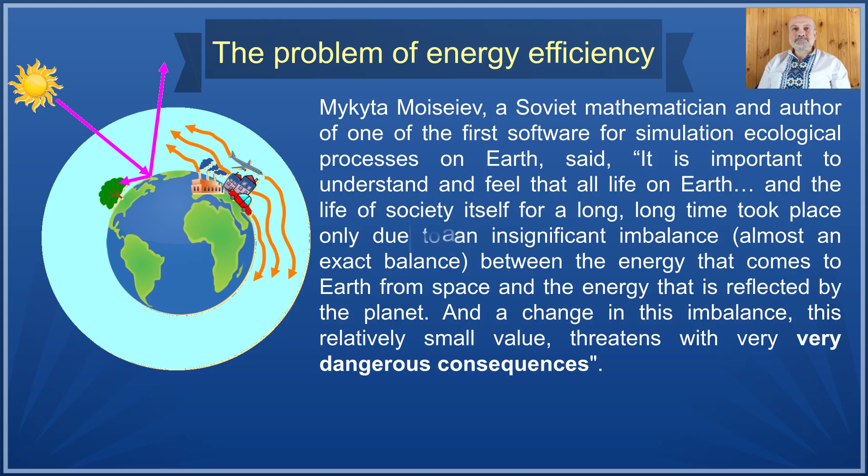This creates a vicious circle of problems, leading to an avalanche of climate change. Therefore, increasing energy efficiency is a key task for achieving Sustainable Development Goal 13. Energy efficiency must be implemented comprehensively, accounting for energy generation, transmission, and consumption as a single system. Otherwise, efficiency will be reduced.

A comprehensive approach to energy efficiency in construction: the energy efficiency of a building begins with the choice of its shape, since heat loss occurs through the thermal envelope - the walls, the floor, the first floor or basement, the roof, or the attic floor. The most rough criterion for optimality is the compactness ratio, the ratio of the area of the thermal envelope to the volume of the building.

For buildings in which all horizontal sections have the same shape, the ratio of the perimeter to the area of the horizontal section can be used. The smaller this indicator, the less heat loss there will be, meaning the building will be more energy efficient. In all cold countries, in accordance with this criterion, builders tried to construct houses of the simplest possible shape.

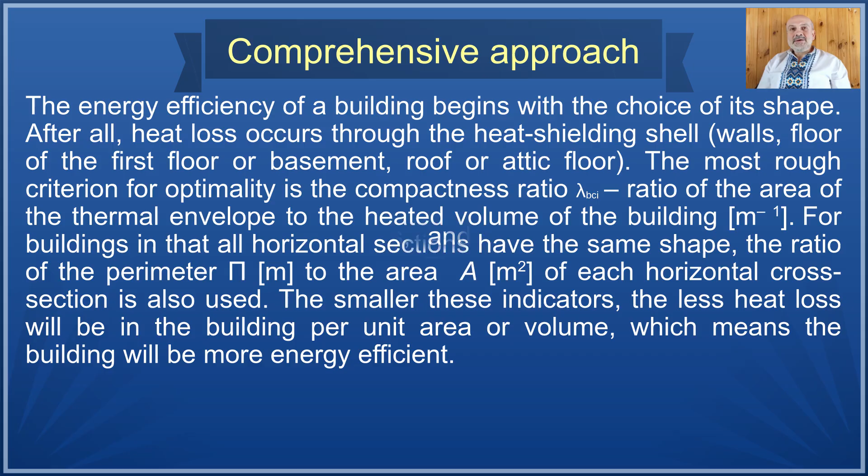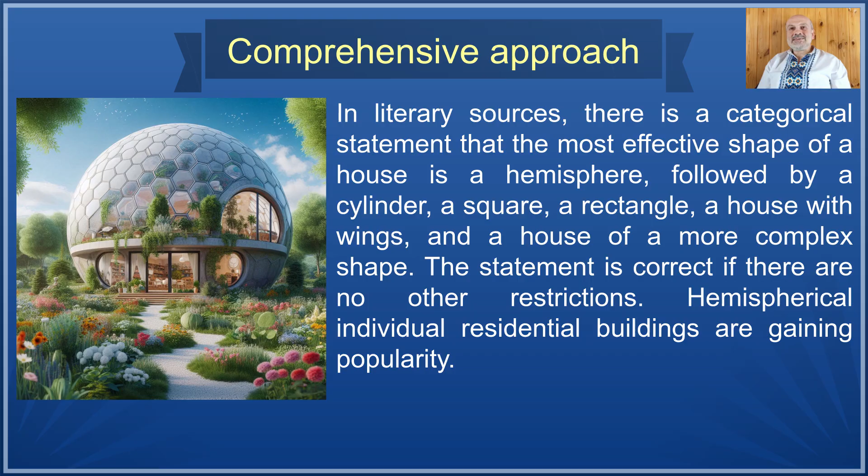In literature sources, there is a categorical statement that the most effective shape of a house is a hemisphere, followed by a cylinder, a square, a rectangle, a house with wings, and a house of more complex shape. This statement is correct only if there are no other restrictions. Hemispherical individual residential buildings are gaining popularity.

For a residential and office building of a certain layout type, the conditions of natural illumination limit the maximum distance from any internal point in the plan to the external walls. Under these conditions, round or square buildings in plan will always have a larger area of thermal envelope than a rectangular one. An oval shape will be even better.

At the same time, enlarging the building length decreases the perimeter per unit area. If the shape of a building with wings were so inefficient as described, castles and palaces would never have been built in this form in our latitudes. Nevertheless, figures show the equivalence of the winged shape and the rectangular building by perimeter, area, and volume, if the width and height of all parts of the building are the same.

Similarly, turning a building at a street corner doesn't change these parameters. The criteria given don't take into account the influence of solar radiation or wind conditions from different directions. Therefore, constructing the optimal geometric shape is a difficult task.

Further, the choice of indoor environment parameters will have an impact on energy efficiency. This choice always faces a contradiction between comfort and energy consumption. Thermal comfort of a person corresponds to the case when he is able to dissipate all the heat produced as a result of metabolism without straining the thermoregulation system, and even more so without increasing or decreasing body temperature - hyperthermia or hypothermia. The heat productivity of a person from metabolism depends on the activity.

The possibility of heat transfer are determined by 5 microclimate parameters: air temperature, relative air humidity, air velocity, the level of velocity pulsation or turbulence intensity, and the average surface temperature or radiation temperature, and in addition by the thermal resistance of clothing. Thus, the energy efficiency of the building's microclimate formation strongly depends on non-building factors such as lifestyle.

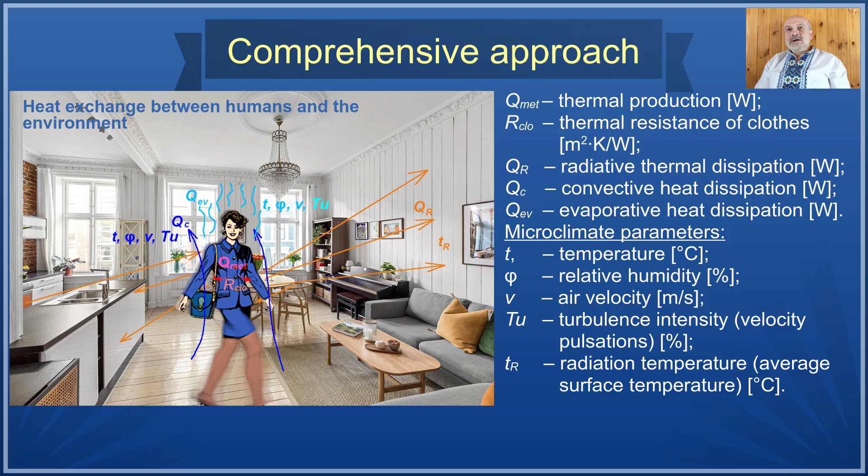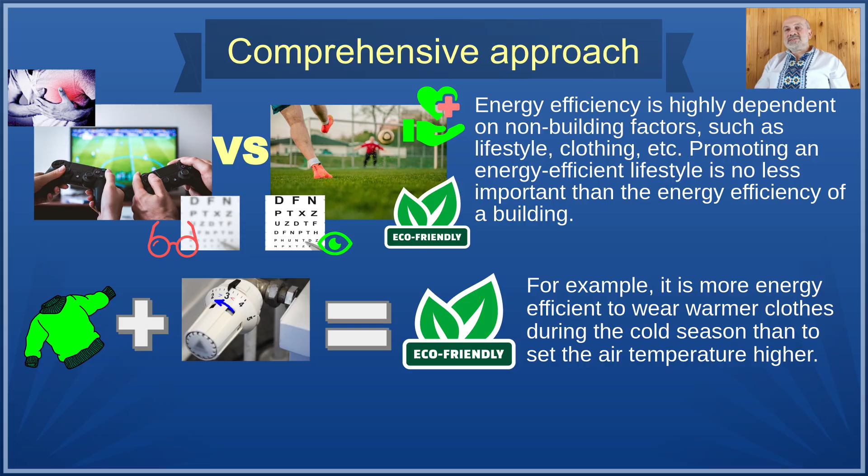Clothing, etc. Promoting an energy-efficient lifestyle is no less important than the energy efficiency of the building itself. For example, wearing warmer clothing during the cold season is more energy efficient than setting a higher air temperature.

The next bastion of heat and cold preservation is the thermal envelope. Undoubtedly, increasing the thermal resistance and increasing the tightness reduce the heat loss of building, which are the main directions of increasing energy efficiency. Nevertheless, thermal inertia has a double effect.

It reduces the influence of external temperature fluctuations on the thermal regime of the room, which facilitates the work of engineering systems. On the other hand, it creates a significant delay in the reaction of the room to internal variable heat gains, and accordingly complicates the reaction of engineering systems to them.

Further, the energy consumption of a building for the microclimate formation and meeting other needs is determined by its engineering systems. The two main requirements are minimal unproductive energy losses and effective automation of the response to changing indoor and outdoor conditions. Practice shows that thermal insulation of a house without heating automation increases energy consumption because people are forced

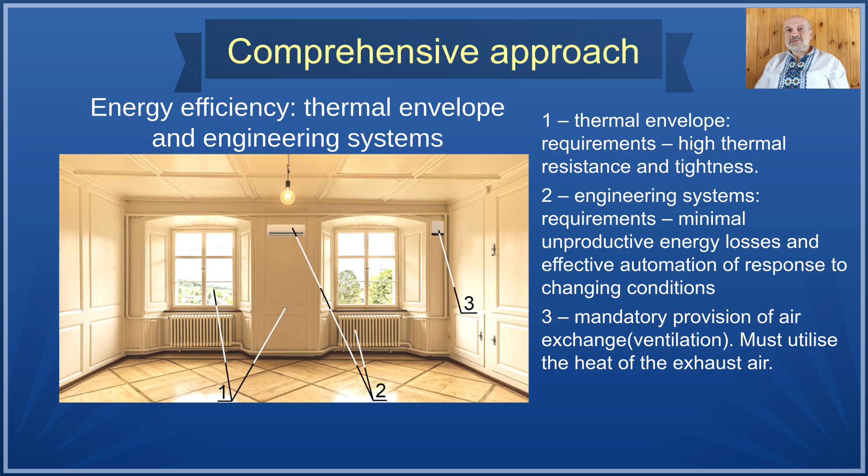to dispose of unnecessary heat by opening windows. Sealing a building allows controlling air exchange but doesn't eliminate its need. It's strictly forbidden to avoid sufficient ventilation in a sealed room.

Otherwise, moisture, carbon dioxide, and pollutants from furniture and equipment will accumulate in the room. Increased humidity will lead to development of mold, which releases the world's strongest carcinogens, mycotoxins. As a result, a sick building syndrome occurs, manifested by symptoms of respiratory, cardiovascular, and other diseases that are not treatable with medication. It's treated only by ventilation.

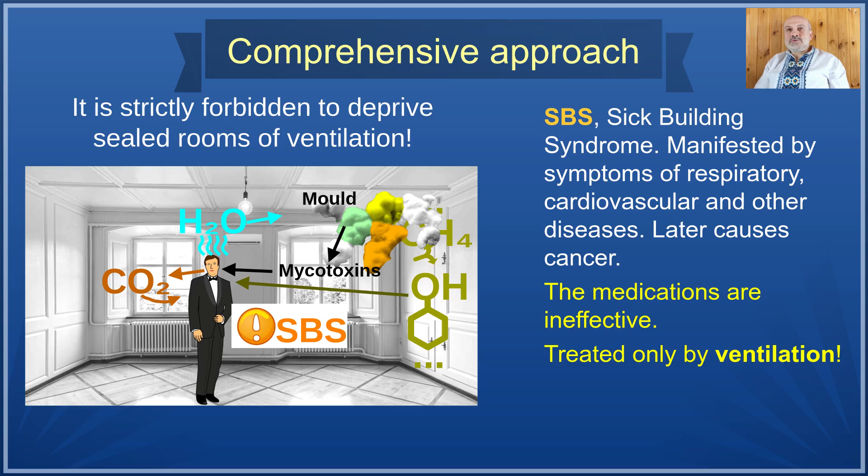For energy-efficient ventilation, there must be utilization of exhaust air heat. Also, the utilization of heat from sewage and other possible sources is envisaged.

To summarize the different ways of energy consumption of different energy types, the concept of primary energy, extracted energy before any conversion, is currently used.

For different energy carriers, primary energy coefficients are taken into account, which consider its conversion and additional costs for obtaining the energy carrier. This approach is not ideal because it doesn't take into account the different potential of its different

types. For example, electricity can be converted to heat up to 100%, and the efficiency of the reverse conversion is limited by the second law of thermodynamics.

A more adequate method, exergy, takes into account only that part of energy that can be obtained before achieving equilibrium with the environment. Despite better compliance with the physical content, this method still expects widespread use in construction.

To determine energy efficiency, the concept of energy efficiency classes was introduced. Back in the last century, the system of energy efficiency classes was calculated from A, the highest, to G, the lowest. The problem with this approach is that as the development of technology and energy efficiency increases, the classification system in this direction reaches a dead end.

There are no letters before A. It's impossible to fix this for established association among consumers. Therefore, it's necessary to introduce classes A+, A++, and A+++, and then rewrite the entire classification system.

So old class A equipment may correspond to modern class D. It should be understood that the energy efficiency class itself doesn't determine a specific value of energy consumption.

It's a range of possible energy consumption relative to certain baseline levels. Actual energy consumption is affected by operating modes, device settings, lifestyle, etc. It can only be stated that equipment of a higher class will consume less in the same conditions.

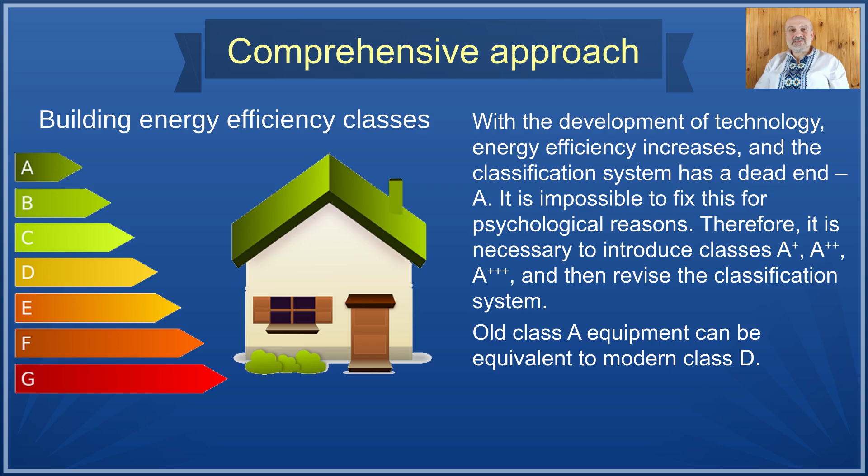The classification can be deeply revised. Let us show the example of Ukraine.

Until July 2018, the specific energy consumption EP for heating, cooling, air conditioning, and hot water supply was related to the total heated area of residential buildings or the total heated volume of public buildings.

Since July 2018, the class is determined by the specific energy consumption for heating and cooling or air conditioning only.

One of the problems of the classification until July 2018 was the narrow range of Class C, which was later corrected. Thus, for the secondary market, we need to know the classification at the construction time in the corresponding country.

Ukraine, thanks to the well-known specialist in the field of heating and ventilation, candidate of technical sciences, Associate Professor Viktor Pyrkov, introduced into world practice of energy efficiency the requirement of classifying elements of engineering systems, not only buildings as a whole. At the same time, the energy efficiency class of a building cannot be higher than the lowest energy efficiency class of any element of the engineering system.

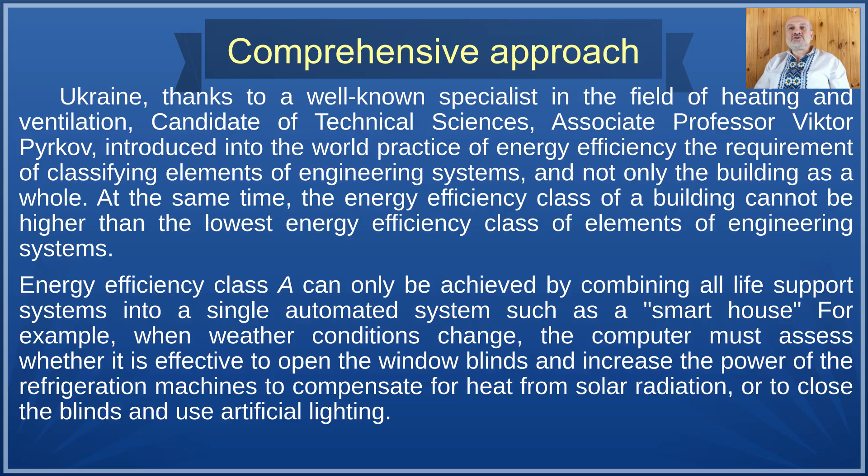Energy efficiency class A can only be achieved by combining all life support systems in a single automated system such as a smart house. For example, where weather conditions change, the computer must assess whether it's effective to open window blinds and increase the power of the refrigeration machines to compensate for heat from solar radiation, or to close the blinds and use artificial illumination.

An important point in centralized energy supply is the linking of the operating mode of energy generation, distribution, and consumption systems. For example, low power consumption leads to idling of turbines of electric generators and production of energy that isn't consumed, especially at nuclear power plants.

This can be compensated by electric heat storage heating systems. Heating devices heat up at night and gradually give off heat during the day. These systems have low energy efficiency due to double energy conversion and unpredictability of energy demand the next day, but they consume free energy which would be dispersed into the environment in any case. Then use of electric accumulators will be more effective, but today such devices remain environmentally hazardous during disposal.

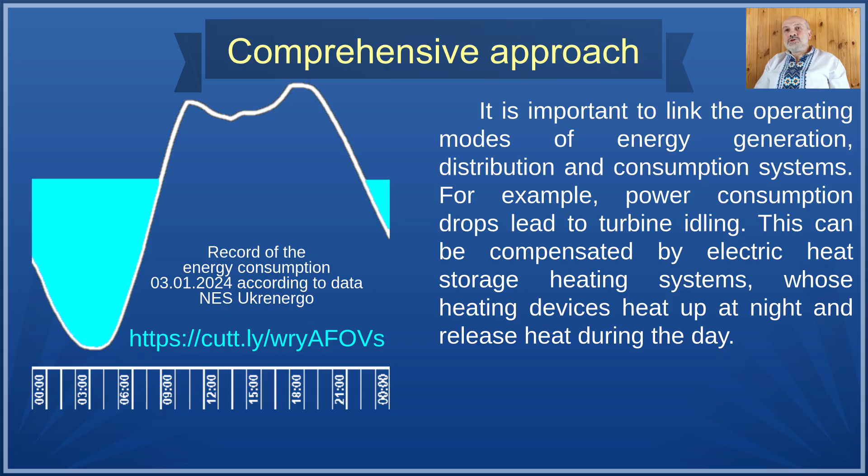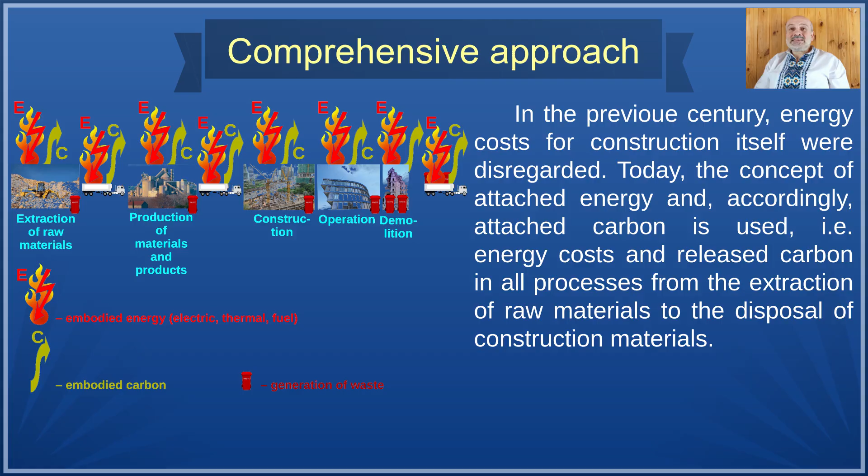All of the above only considers operational energy costs. In the previous century, energy costs for construction itself were not considered. Today, the concept of embodied energy and accordingly embodied carbon is used, that is, energy costs and released carbon in all processes from raw material extraction to the disposal of building materials. At the same time, all technological processes, transportation, installation, etc. are taken into account. Specialized databases can be created for various building materials and products.

And now let us talk about the transition from energy efficient house to energy plus. Construction with near zero energy consumption has become a logical continuation of energy efficient construction and has become possible with the development of renewable energy and the use of secondary sources.

It has become possible to achieve a level of energy demand that can be covered by secondary resources: heat of exhaust air, wastewater, and renewable energy, solar, wind. From 2021, all new buildings in the EU must be built with at least near zero energy consumption.

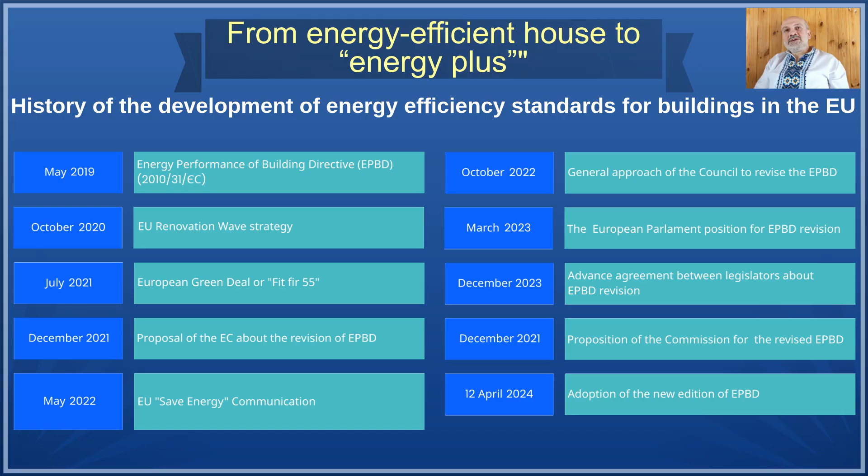The development of European standards in the field of energy efficiency is shown in the infographics. The requirements for near zero energy buildings are highly dependent on climate conditions. The EU requirements are different for different regions and different types of buildings.

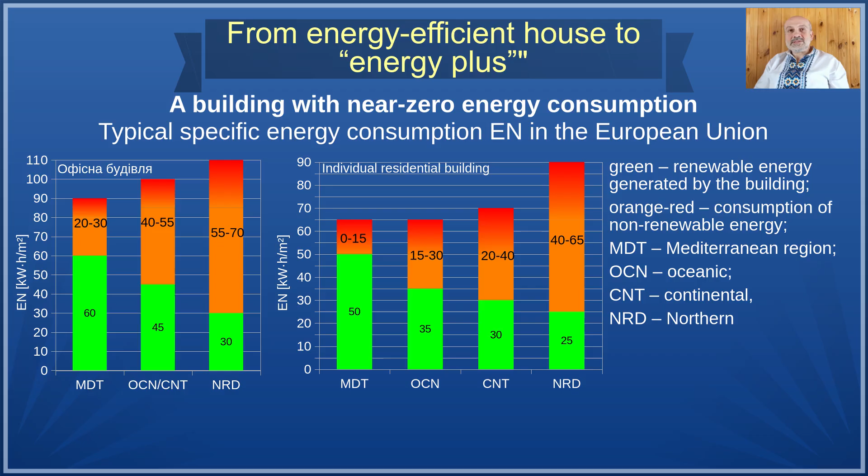One of the major problems with most renewable sources is their intermittent nature. This problem is solved in three ways. The first way is accumulation. It's associated with the following problems: for thermal energy, a large volume of heat storage; for electricity, the environmental hazard of batteries, or in the case of using water electrolysis, the explosion hazard and low efficiency; for mechanical energy, large flywheel sizes and the danger of their self-destruction.

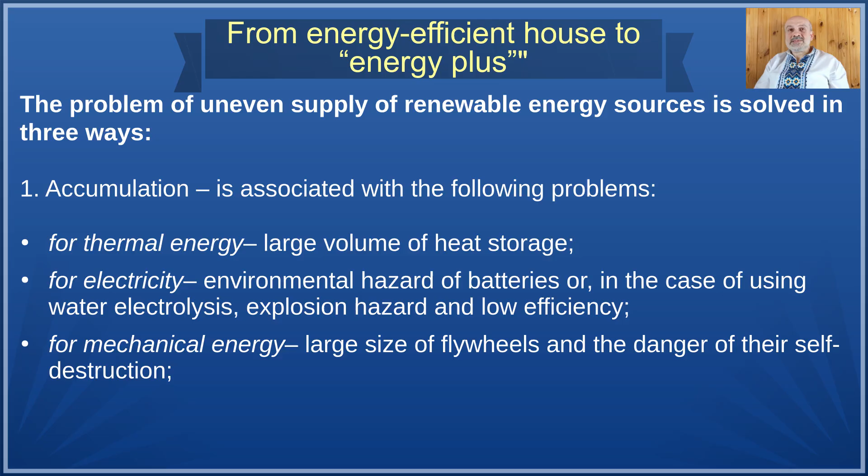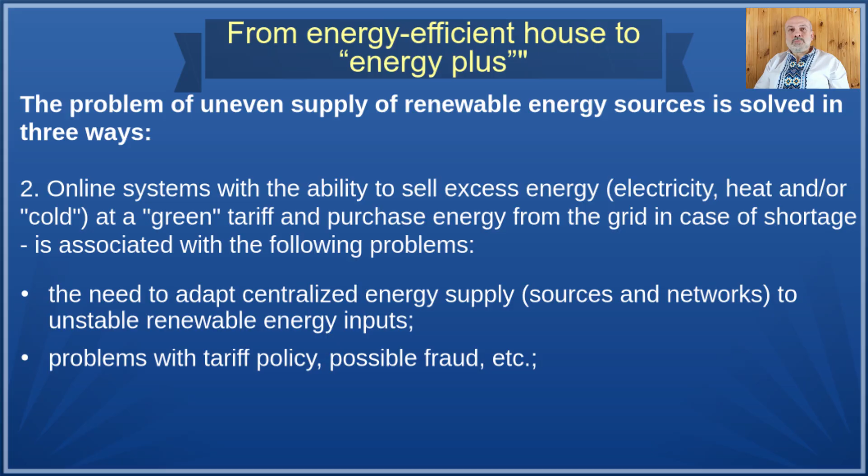Online systems with the ability to sell excess energy, electricity, heat and or cold at a green tariff and purchase energy from the grid in case of shortage are associated with the following problems: the need to adapt centralized energy supply sources and networks to unstable renewable energy inputs, problems with tariff policies, possible fraud, etc. Coordination of energy consumption and supply regimes is the third way.

For example, washing and dishwashing with available renewable energy requires having a sufficient amount of dishes and clothes in case of a prolonged energy shortage, as well as an adequate response to a possible sudden interruption of energy supply: sudden cloudiness, cessation of wind, or sudden storm. Heating hot water requires a sufficient volume of water heater and suffers from problems in the long-term absence of renewable energy.

Mobile device charging can only be arranged for devices with a suitable usage pattern, such as flashlights or laptop tablets, that are used personally during non-working hours. For phones or laptops that are used continuously, this can be arranged from wind energy available at night, but not from solar energy available during working hours.

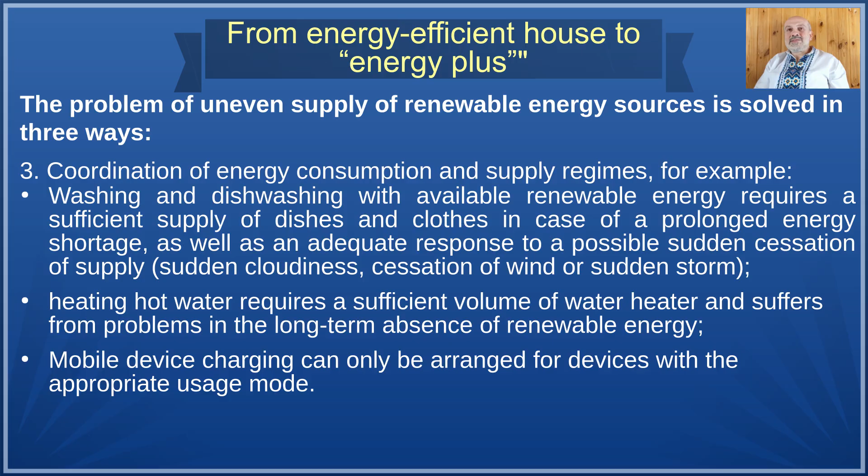Reducing energy consumption and increasing the generation of energy from renewable sources allows achieving a complete balance between consumption and generation of energy. In such houses, not only is the roof used to convert solar energy, but also translucent fences, blinds, walls, etc.

Such houses are called houses with zero energy consumption. It would be correct to call such houses energy independent, but if they don't use the capabilities of online systems, then a disruption in the system will lead to idle energy generation and the lack of life support during a shortage of renewable energy. Their specific energy requirements must correspond to the available generation capabilities, which are in the vast majority lower than the standards for near zero energy buildings.

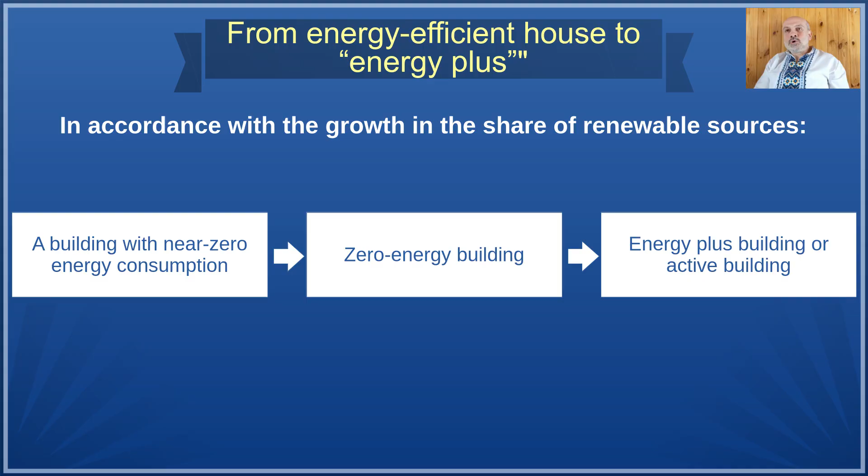Further increase in generation leads to its exceeding of energy needs. Such houses are called active or energy plus. This allows receiving not only comfort but also income.

Let us talk about cautions. Near zero energy and energy plus buildings rarely pay for themselves in a reasonable amount of time. They are built primarily because of social responsibility, to achieve a certain level of prestige, and to achieve energy independence in order to avoid problems in the event of centralized power supply failure.

They often generate significant income and pay for themselves quickly, but not directly. They serve as advertising for the products or services provided there.

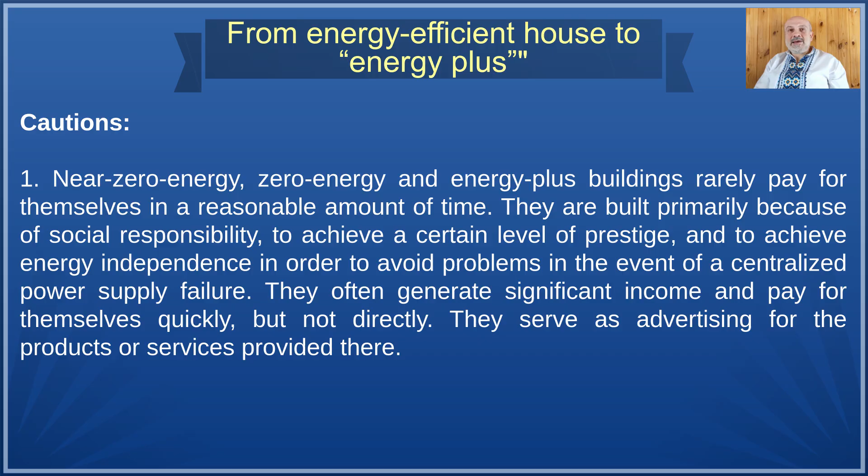When building houses with energy generation, it's important to remember that generators have a limited service life. For example, solar panels degrade, that is, they constantly reduce the efficiency of converting solar energy into electricity. It's believed that when the efficiency drops by half, the panel's life is finished. But everyone sets this threshold independently.

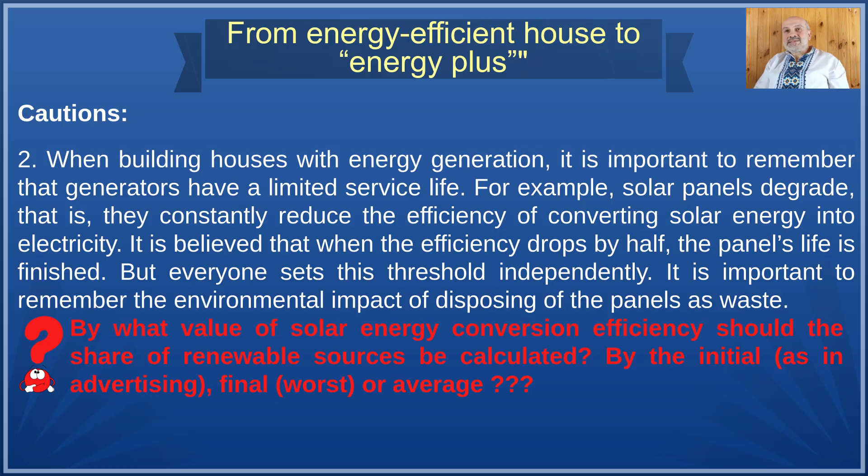It's important to remember that the environmental impact of disposing of the panel as waste is not so good. Modern electric batteries wear out with a gradual decrease in capacity and a possible sudden complete loss of it at a certain point in time. The chemicals in such batteries are dangerous for the environment and cannot be recycled.

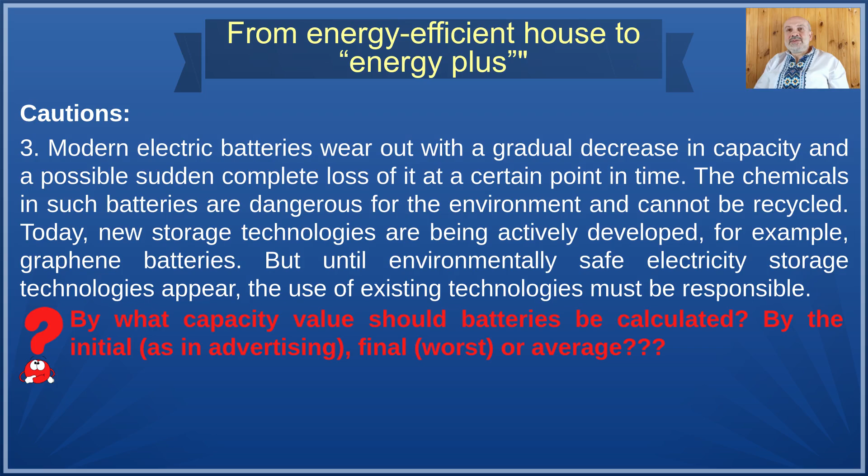Today, new storage technologies are being actively developed, for example, graphene batteries. But until environmentally safe electricity storage technologies appear, the use of existing technology must be responsible.

And now let us conclude. Energy efficiency is a necessary condition for the survival of humanity. Increased energy consumption leads to the launch of a vicious circle, deepening climate change and increasing energy needs.

Energy efficiency in construction should be approached comprehensively, taking into account both construction and non-construction factors. In particular, the key condition is the promotion of an appropriate lifestyle. Thermal comfort is determined by the ability to dissipate the heat produced as a result of metabolism without straining the thermoregulation system.

The energy efficiency of a building is ensured by the correct shape, thermal insulation shell, and engineering system. Energy efficiency should be considered in the complex of energy production, supply, and consumption.

For example, less energy efficient solutions such as heat storage heating, which allow using energy during a period of energy consumption drop, increase the efficiency of such a complex as a whole.

Buildings are classified according to energy efficiency classes from A, highest, to G, lowest. At the same time, the classification is periodically revised.

If previously only energy consumption during the operation of a building was considered, today the concept of embodied energy and embodied carbon is used: energy consumed and carbon released throughout the entire life cycle of building materials and products, from raw material extraction to waste disposal.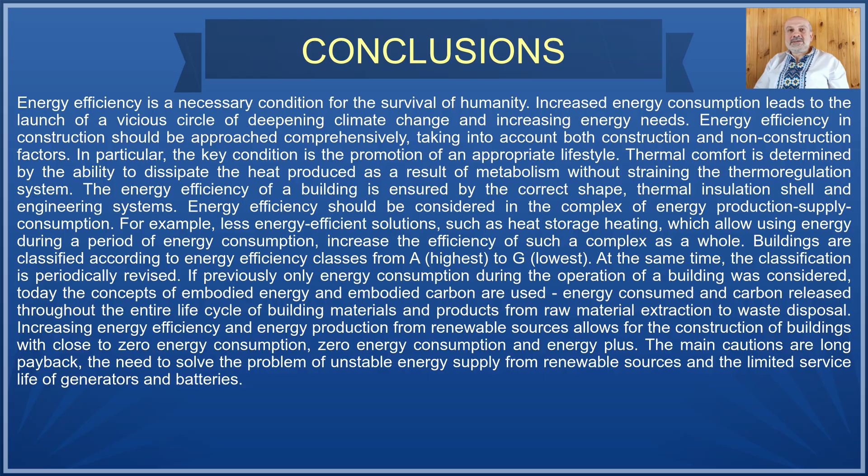Increasing energy efficiency and energy production from renewable sources allows for the construction of buildings with close to zero energy consumption, and energy plus. The main cautions are long payback and the need to solve the problem of unstable energy supply from renewable sources, and the limited service life of generators and batteries.